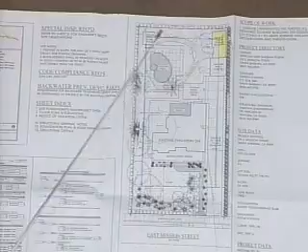The purpose of today's hearing is to discuss the legalization of this as-built storage building. It is located within the required interior setbacks, and this is an E1 zone, so the required setbacks are 10 feet from the interior property lines. The setbacks are shown in blue, and the portion of this structure that is encroaching into the setback is highlighted in yellow. The project also requires a modification to our maximum accessory building size of 500 square feet.

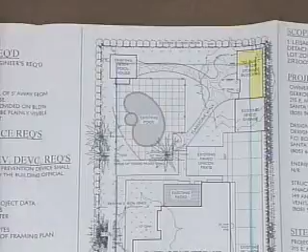Staff does not support this particular modification request, because it is essentially new floor area in the required setback. Staff typically doesn't support new floor area in setback areas when there is a conforming location for a similar type of structure. This is an as-built structure, however staff reviews it as if it were brand new to the site and new square footage. Staff is not opposed to the modification request for the accessory square footage in excess of 500 square feet; however, we believe it should be in a code-conforming location. That concludes my report. Thank you.

Great, thanks. I was wondering, I did have one question related at this point. I went out to the site, and I don't know if you know the answer either, so maybe I'll wait until you do your presentation, because you might. Well, my question relates to, I went out to the site and looked at it, and it is clearly a storage structure, obviously tacked on. My question was whether it could receive a building permit as is.

I've checked with the building department on that, and there are some improvements needed. Cindy Souter, agent for the owners, Jerry and Barbara Rubin, the owners of the property. I did check with the building department, and they are going to need to do some improvements to let it remain, basically installing a firewall on the two property line sides, because it is closer than 3 feet to the property line, and there may need to be some roofing improvements made as well.

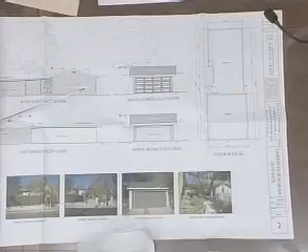Again, my name's Cindy Souter, agent for the owner, Jerry and Barbara Rubin. I brought my own little colored site plan today, too, just to help show the constraints on the property and the existing situation on the property today.

We disagree with staff's recommendation for denial of, or lack of support for, the two setback modifications in this motion for denial.

The property is a potentially historic structure, the Driscoll House. So the house itself and the area around the house is somewhat sensitive and should be preserved as is. This little walkway here is original brick.

And this is a little courtyard. Everything that's green is landscaping, and the lighter green is lawn area. So there's not much lawn, but it's mostly landscaping. This is a little landscaped courtyard area right here, and there's lots of trees, including an oak tree. So this isn't really an appropriate space to put it, plus again you're getting close to the house, which is the resource.

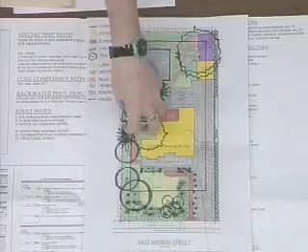The backyard is fairly developed. The pool area obviously needs to have the fence around it, so that's an area that needs to remain as is. This little landscaped area in the back is really the only functional yard area that the property has. There's a little picnic table here, and then some nice native gardens with native plants. So the most logical place for the storage building would be in this rear corner, where it is not impeding the use of the property but also allows the storage to function as a storage unit.

The garage is only 346 square feet, so it's very small for a modern day two-car garage, and two cars barely fit inside of it. So there is a need for storage, as with most garages, you have around the edges to keep things stored. This allows for them to have additional storage.

It is a non-habitable use. It's storage. It's in the setback, so it's not creating a noise-generating activity or anything in the setback. It also provides a view buffer between these two properties. There's an RV parked here that would be visible if the building were not there, and it also provides sound screening from the neighbor next door as well.

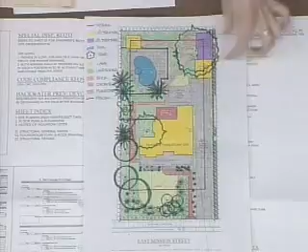We have letters of support from this neighbor, who's obviously the most impacted because they have the most linear square feet of the structure adjacent to their property line, and then from the neighbor over here as well.

And let me check my notes real quick, see if there's anything else I want to add. And the Landmarks Committee did support the location in this far corner because it was away from the resource.

That's the end of my presentation. Okay, great, thanks. I'd like to open the public hearing. Is there anyone here who would like to address the staff hearing officer on 215 East Mission Street? Seeing no one, I did receive one letter from Ms. Paula Westbury expressing concerns regarding the project, and the two letters you referred to were included in my packet. So I'll close the public hearing.

I went out to the site, like I said, and I walked around the site, and generally I agree with staff that the first thing to evaluate when someone's proposing something in the setback is whether there's a conforming location that would work for the project. In your instance, the most logical area would be the one you pointed out, which is the existing usable area besides the pool. In terms of functional use, like eating and that kind of stuff, it's in this area.

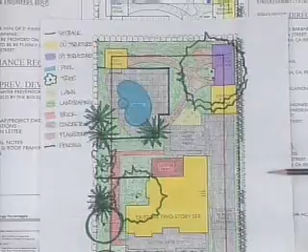What I'm leaning towards is, given the existing development on the site, given the fact that the two oak trees that are there, the location preserves the two oak trees, it's tucked in behind the oak trees. It's a low profile, it's 7 feet tall, which is shorter than the fence height limits, which can be 8 feet in the setback. So the building as it is right now, I believe, can be supportable.

My concern is what kind of changes would be required for building code. Any changes would retain the existing size and shape of the structure. Everything would be done internally. If the roof were to be replaced, it would be replaced like for like with whatever is matching, whatever meets code, but it would match how it is there. Maybe instead of the corrugated roof, it might end up being a flat roof, but the size and shape of the structure would not change as a result of that.

I'm looking for my email from Curtis, I think. It's the one that sent it to me that specified the exact criteria to make it meet the fire code. Which is in here somewhere. Let's see here.

Okay, and then if the roof had to be replaced with some other material but maintain this appearance, would that be an acceptable change? I'm concerned with the height, not the material. In terms of appearance, no issue - it's more the low profile, it's 7 feet. So it's low.

Maybe just add that any modifications could not result in a height taller than 7 feet. Well, in the findings I put it at 7 feet in height, and in the condition I put the roof height changed. I'll put the roof height increased, because if it gets lower that's okay. Right, so just make it clear the concern is having it raised.

Okay, so with the revised findings that it is appropriate, given the reasons I outlined, and with that new condition, I approve your project. My action is appealable to the Planning Commission within 10 calendar days. They also have oversight authority of all my actions. If they felt this warranted additional discussion before them, they could call it up during that same 10-day appeal period, and if that occurs, Allison would contact you. Okay, thank you very much.

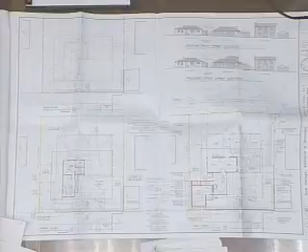I did want to highlight that staff had referred this project to the city's urban historian during the environmental review because the structure is over 50 years of age. The urban historian determined that the proposal did not have an adverse impact on a potential historic resource because they are preserving the front facade of the building, and the new second story is very low profile and not readily visible from a pedestrian on the sidewalk.

You might see it from across the street, but if you were on this side of the street on the sidewalk, you most likely would not read that as a second story. The project as designed is consistent with the Secretary of the Interior's design standards for the treatment of historic properties. The environmental analyst has determined that the project was exempt from further environmental review under the California Environmental Quality Act. The project went to design review at Single Family Design Board on January 28th.

At that time, the board found the requested setback modifications and the second story addition to the legal non-conforming residence were aesthetically appropriate and did not pose any consistency or uniformity issues with the single-family residential design guidelines. At that hearing, there was a little discussion about the existing hedge along the rear property line that is now about 11 feet tall, and staff has suggested that they trim it and maintain it in compliance with the hedge height ordinance, which is 28.87.170.

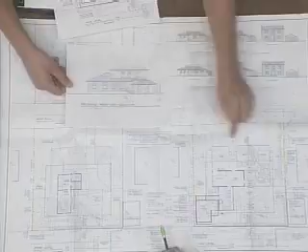The actual dimension, which I have, is 6'5". This front entrance right here at the front door, which is part of the architectural charm, it's 5.5 feet wide, and it creates an alcove, which is kind of like welcome to my house. And I envisioned having a stool here, a bench, a chair. My client works for the Santa Barbara Orchid Estate, so he's always got muddy shoes and all that kind of stuff. So that's kind of what this is, my outdoor mudroom, as well as creating the artistic charm.

Perhaps there's a way of moving a little bit of the garage forward, but I still believe the door is very important, because if there is no door, when we move this flush with what used to be the old sunroom, then every time you park here or you're coming from this direction, you're forced to open the garage door to get into the house. And this door is important—if you narrow this and pinch it down so it's only 3 or 4 feet wide with a 3-foot door, it's basically an alleyway, it doesn't have what I want to call the elbow room.

I always refer to it as a place for a person to stop and pause and wait for a moment, and then enter the room. So I want to have enough room—that's kind of always the way it was designed. The other thing is kind of like in those old black and white movies with Gracie Allen and George Burns, the neighbor always comes by and comes to the back door and they're always talking. So there's that kind of interaction that I kind of see happening here. It's important for me.

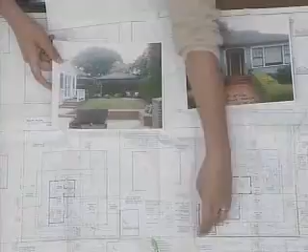The other issue is, as we move the garage forward, we have to realize the impacts happening to this neighbor. This neighbor is used to having this wall here, and we've abandoned this landscaping, and as we slide this forward, it creates a different zone right here, where right now they have these tables and chairs. So if we take this mass and slide it over to give relief to one side, to another neighbor, we're actually impacting what this neighbor is experiencing.

It's important to realize we propose an 8-foot-high fence along this property line. And if our garage, the top of plate is at 7 foot 11 inches, plus the framing above it, the garage isn't much taller than the fence we're proposing. So by moving it over 3 or 4 more feet, we're not benefiting one neighbor at the expense of another's use of their yard. We have to weigh it back and forth.

My strongest point is the creature comforts, the romantic aspect of using this house, as well as trying to create the artistic charm. So that's kind of where I've been coming from.

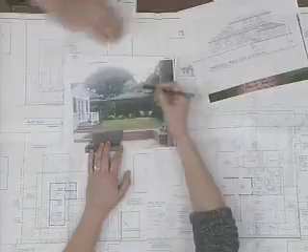You're filling in this area already. So how is moving it up impacting the neighbor here? It's opening up this back area. We're filling this up, but we're filling that area up 12, 15 feet beyond. When we slide this wall over, this wall is right at the property line, or a foot from it.

Yes, so we're taking this element and sliding it over. We will have to trim some of this hedge, and that's just what it is. And this little fence they have here, which is on the property line, will get altered.

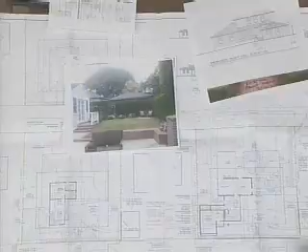It's like 1 foot 8 inches now, and we're moving it to 3 feet. The reason for 3 feet is the building code rule: if you're less than 3 feet, you have to have a firewall measured from both sides of the framing, not just the inside of the framing.

Okay, and this dimension here, I have it at 6.5 feet, and at the front door it's 5.5 feet. So there's room to move it another 1.5 feet, but not much more than that, because then this becomes just a windowless little alcove - it gets boring and cold. I always envision a little potted plant or a bench to enliven that entry.

Okay, great, thank you.

Is there anybody here who would like to address the staff hearing officer on this, on 32 East Islay Street? No?

I'd like to note I did receive a letter from Ms. Paula Westbury on this project, also expressing concerns regarding the project. So I'll close the public hearing.

I also want to note that at the Single Family Design Board level, two neighbors submitted letters. One was Greg Morell - is that right, Phil Morell? Phil Morell, I think I'm combining the two names. Phil Morell and Mike DeLuca.

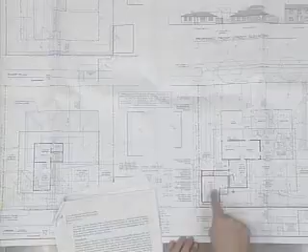Like I said, I went out to the site, visited it and walked around. I believe the modification request to allow the reconstructed garage to remain within the east setback, as well as the extension to meet code requirements, is an appropriate improvement on the lot. My main concern, as I pointed to in my questions, is this rear proposed setback, given that it appears there is room to move the building up.

And you're saying you'd be willing to move it up a couple feet? A foot to a foot and a half. I wouldn't want to make it less than 5.5 feet, which is what they currently have here. If you went to the front door and stood there, you'd realize this is tight, and so I stood there thinking I'm going to make it a little bit bigger. So I would not like to make it less than 5.5 feet wide. Right now I'm at 6.5 feet, so it'd be moving the garage forward an additional foot.

And as the property owner, you'd be agreeable to that? You're on the spot. Well, in order to get this thing through, probably. But with the fence and the height of the roof and the way the balcony is, I keep losing more and more space.

Okay, well, I don't feel I could support it as is. So I could just deny it and it could be appealed to Planning Commission, or I could approve it with the additional foot and a half encroachment.

And then you can discuss going with a foot, and discuss it and decide if that's livable, and you still have the option for appeal. It'll be 5.5 feet, which will be livable. It'll be the same as this area.

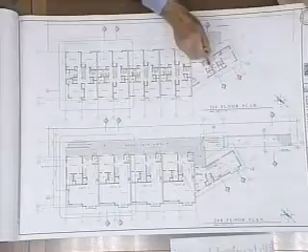The last time it was reviewed by this board, was it 4 units? Yes, 6 actually. 6 and 2. Before it was 8 and 1.

So this is a roof plan. It's a flat roof plan, a membrane. That gives some idea how it drains.

And large floor plans showing the paving on the first floor, and some pots that we're going to talk about in a few minutes - very, very large planters. The other element on the first floor is the ADA unit and the townhouse above.

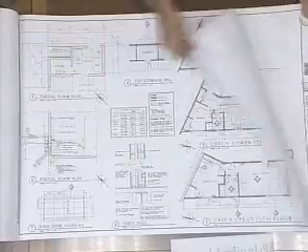This is the paver I'm trying to use on the second floor. It seems like we can afford that, it's not that large an area.

This is how it has changed. As I mentioned, I did change a few things. This is at 1/8 inch scale. The next page shows the main portion at 1/4 inch.

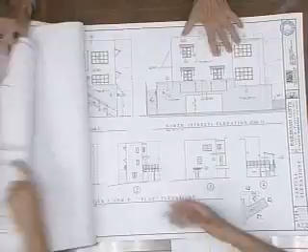Can we actually look at this just briefly? Yeah. So this versus that. I just was, yeah, here. You're gonna see much later on, you'll see the... yeah, you're faster, somewhere in here we go. Yeah, basically here. Okay.

This basically was a personal reaction, a way to tie the building together with metal awnings on both sides, where needed, in order to create shadows, and it goes from here to there. These awnings are carried around on the other side.

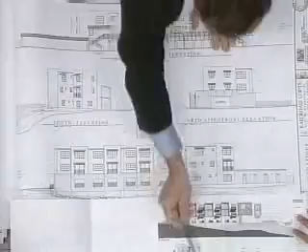And trellises. Another change is the substitution of glass canopies, which were used on the entrance - these are glass canopies, yes, one in the front, including the one in the front for a trellis. It's part of the strategy to green up the building.

Is this a metal trellis or wooden? No, it's steel. There's no wood in this project. The idea is to have different levels, especially coming here from the more visible side. So we have trellises on the fence, vines on the fence, vines on the railings, and finally vines on these elements right here.

And this building material, was it different than this one, or are these the same materials? It's all plaster that indicates a darker color. Oh, so there are lines here? No, I'm sorry, it's just a way to indicate the different colors.

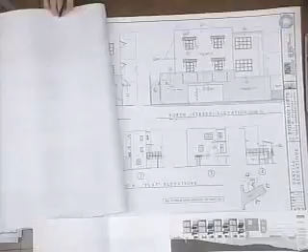This light is not very good - it could look like white when the sun is out. It's called mushroom basket, it has basically the color of a mushroom. This is a color for this portion of the building, a color for the doors, the windows, the galvanized, and the roof membrane, which is a white roof.

That's as close as it gets sometimes. I mean, this is a white membrane. That also is a cool roof.

Let me go through it, and then we'll go back to elevations. I'm sure you have interest in commenting on that. These are the main elements.

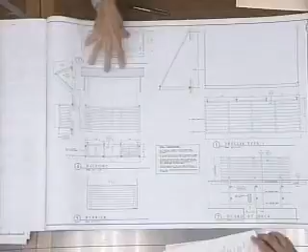Usually they go like this: they have the awning, the balcony, and the car barrier below, the steel trellis and the railing.

This is the other one - the one in the front is a little bit different, the front staircase.

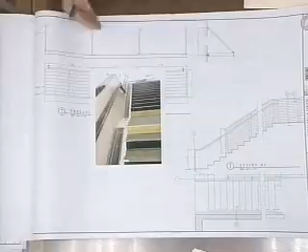I have a detail here that relates a bit to what we do - this is kind of interesting, perhaps you can take a look. This is a retrofit in a London subway. The purpose of these things, which I have another detail of, is to basically bring bicycles up - probably everybody's experienced going up a staircase with a bicycle. In Europe they do it like this. I've modified this sheet to add this detail, paying attention to it. It's just a little detail, but it would be a nice thing to popularize - you bring this little 4-inch curve for people to wheel their bicycles. Just a little detail.

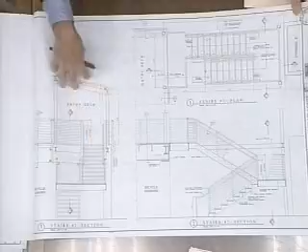This is the rear staircase, which is really very different from the one approved previously. I carry the same roof. The other one had some kind of covering, maybe concrete or plaster. I thought it would be easier to just blend it with the rest of the galvanized awnings. It's an open staircase. This is the section through this.

The structure has changed completely. It used to be concrete T's spanning the whole building. We want to use steel to make it lighter, to have fewer piers. The soil is very loose, I think it was a site with some kind of uncompacted soil, so we're relying on that.

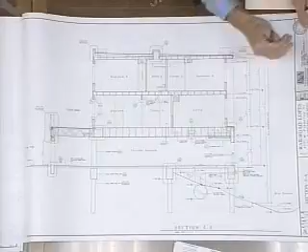This little thing is a requirement of flood control, not to occupy the space. If we close the building here, we eliminate an area where water is stored. This is on the west side, and the pipe that connects under the freeway is undersized. The water backflows in a 100-year storm and floods this area, so we're not supposed to minimize this floodway area.

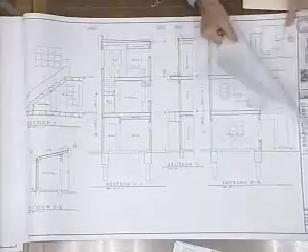Same. This is the section through the small wing. This is an interior elevation, which you don't care about. The basic steel details, the awnings, the attachments, the railing.

The recessed windows—I wanted to at least recess these windows a little bit. Those are standard windows, yeah. All the windows are recessed like that? Yeah, except I couldn't really work on the doors, but there aren't that many of those. So this is the majority, they go like this. And a little bit more.

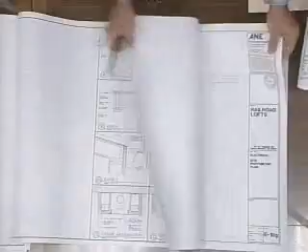It's just basically wall details. Light fixtures, I think you probably would be interested. Exterior light fixtures and site lighting. Yeah, there you go, here we go. This is the light level.

So these are the light fixtures, which I reproduced here. It's just this picture right here. It's flush mounted on the ceiling. So at the exterior doors for each of the units? This one, which we'll paint a different bronze color as well.

It's shown in the elevations. And they'll be bronze in color? Yeah, yeah. Well, excuse me, these ones over here are going to have a ceiling mounted fixture. It's going to be this one. I mean, recessed. But there are some other ones. This one appears a lot, we have like 16 of them.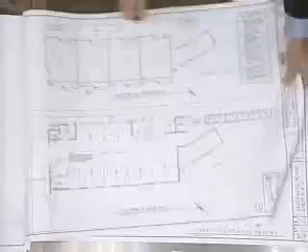The second floor, maybe? Yeah, a little bit higher on this walkway. Okay, and the staircase as well, that appears a lot. I was curious about the light level, and it's pretty much not very bright. You can see how the spill is at 0.01 over here. That is pretty good.

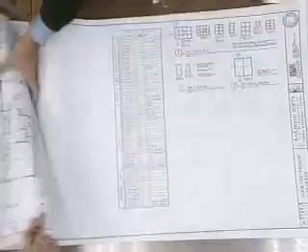Well, we have landscaping—just let Charles talk about this. What I want to mention is that we thought a lot about landscaping on this side, and that's why the concept was to really screen it from this side with the different elements, including the second floor pots, one on one side. Yes.

Alex, can you point out where on the elevation that exposed underneath area occurs where the drainage is? Can you just show how that's represented on the elevation, the 1/8-inch elevations? Where the water goes under the building where the concrete slab is? Sheet 18—oh yeah, it's more under the section.

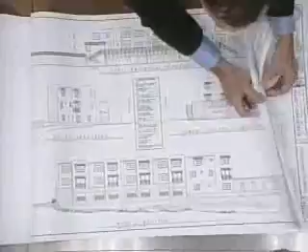Do you see it on the elevation? Yeah, they go right there. Oh okay, it drains to this side, and it goes to the concrete beam from there. I think one of these shows it here like that. Yeah, the water goes to this side, and it goes right there. Okay, and this is for storage and percolation.

I'll just go back to this sheet. Yes, please.

Yeah, so here we've got the landscape plan. Everything on the west side—Alex is calling it the west, I was referring to it as the south side—this is all a bioswale area. You can see that the water comes from the street and from the building roof, and it gets directed into a series of little check dams. We're all riparian and natively planted out there.

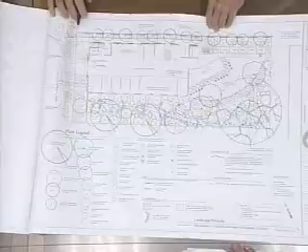Then at the front, there's a street tree, Pyrus kawakamii. We talked to Tim Downey about that. So we've got the street trees, and then a really tough and long-lived landscape, just nice, tough, and strong. We've got some vines coming up on the overhead structure above the driveway, and along the 101 and railroad side we've got screen trees of two different types. And if you'll see, we've got ficus repens pretty regularly on the inside.

If we go over and look at some details on the L2 sheet, here's a section through that—we're giving them a little opening so the ficus can get outside the fence, because the property line's right here. We're thinking this would be ripe territory for graffiti, so that's a custom detail to try and combat that.

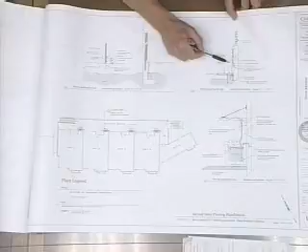And then on the second floor, we have 42-inch heavy pots or urns, and this detail shows how we're going to take a stainless cable up to get them to climb up on these overheads that are dashed. And similarly against the building. Then we go on to some of the stuff the Creeks people are interested in these days, and we're just showing that we're all automatically irrigated.

What's this material going to be for the common area? Well, this is just a 3/8-inch angular gravel court. We talked about different things and concluded on just a gravel court with kind of a rubble or stone retaining wall, about seat wall height. That's our proposal for the open area, a gravel court.

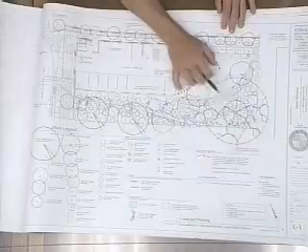And if you go back, you can see how the planting works with that. What was there previously, or was there never any? It's always been gravel in all three of the iterations. So some of the plantings kind of come up out of the gravel, but we propose to float the whole thing in just gravel and let the tenants arrange some furniture or do as they will out there.

Okay, great. Anything else for your presentation? No, that's it. Okay, I will open up public comment.

Anyone from the public wishing to speak on this project? Having no pink slips and no one coming forward, I will close public comment and bring it back to the board for questions of the applicant.

Excuse me, Mr. Chair—we should acknowledge a letter we received from Paula Westbury with concerns about the project. Okay, and a couple of staff comments. Yes, there's some question whether the landscape plan meets the water compliance regulations. So if you approve it, could you make it a condition that we correct that if needed? There are some outstanding issues that haven't been resolved about whether anything needs to be changed.

And the Planning Commission resolution just asks that the ABR review and approve. Let's see—it says prior to building permit issuance, the proposed project grading, landform alterations, structural design, landscaping, and lighting are subject to approval by ABR. All right, thank you.

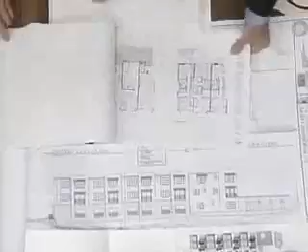Let me go back to this elevation. So it just seemed really trite and silly—I think the comments were that the board wanted more relief, more shadows, more expression of the architecture. Rather than trying to mess with that design, which I thought wasn't going in the right direction, all that design was some kind of celebration of a little window in the bathroom with an indent that didn't quite relate to the vernacular of the West Side. So I decided to simplify that instead, put in awnings, and bring the theme—emphasizing the difference in plane and breaking up the elevation—the same way on the front and on the west side. That's how I addressed that.

I know it's not specifically the same direction, I just thought it was more appropriate. There was a comment about what's happening site plan wise versus there was a themed wall that was going to be trying to come across here. How did that change?

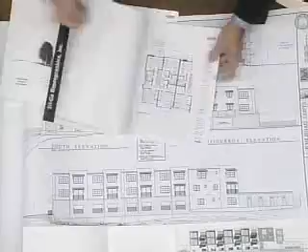Similar idea. That wall was just basically a continuation of this wall with a little arch that really led nowhere. It was a way to come in and check on the meter, on the electric meter on this side. So where are the gas meters and electric meters? Yeah, they're in the front. The electric meters are inside now.

It just seemed too trite. I'd rather have a fence and landscaping. We're going to put vines on this. But wasn't that always a retaining wall? From this, the retaining wall. It is still there, on that side. It's still there, it's a retaining wall with a fence. So now this is just a normal 4-foot fence. Yeah.

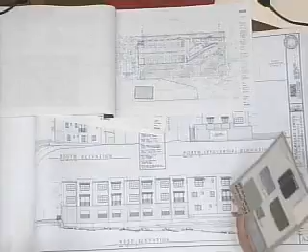If you don't mind, I have one last question, then I'll kick it to the board. This is for staff, was there a previous color board? I was just looking, I don't see a color. We have colored drawings, but no color board. I don't remember these colors from previous applications. But okay, there's interest in a dark color.

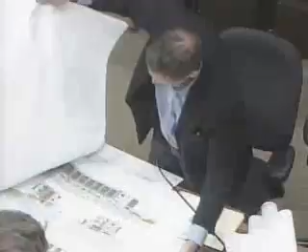This is one redesign. This is the other. These are the way it has evolved. Okay, 2011. 2011, the other one 2008. And the '12, I don't have it in color, but I can see the idea of the darker bottom floor and light on top.

Sure, go on to Kirk. Alex, on the previous proposal, I'm not seeing it noted here, but it looks like there was a different material, at least a couple of different materials, not just changing in color. Hardie board siding, maybe this is what that is. I think it was board form concrete. Okay, that's right. And then there's also looks like there's horizontal siding up here, but that's been eliminated.

We could bring it back, that kind of siding that would be easy, if you feel strongly that that's something. Okay, well I'm just trying to clarify, it wasn't clear if it was blocked or it was covered or exposed.

And then also on the west elevation, it looked like there was an eave that was also being carried down, providing a break between levels. Is that, and that's been completely eliminated too? Well, the eave is there. So okay, a couple of feet bringing it down to the ground. Yeah, I think he had some, he was bringing it. Yeah, if you look at the plan, there was a way to do that.

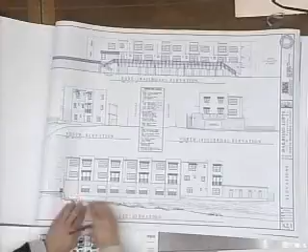Alex, is it a necessity that all of these have to be open? For example, could this end one be closed, or do they all have to be that way? Just wondering if there's a way to bring the building down more to the ground instead of just all stilts. Yeah, it seems like you could grade underneath so the water would still flow around. This is what we really need to do - push it. Yeah, we need to bring this in there.

What is that - some sort of drainage mechanism? Yeah, this is the storage. This is to retain - it's not really flooding, it backflows when it floods. It is to retain the water. There are two things, and this big pipe is a controlled release, retaining controlled release. Is that the idea? Well, all the roof and hardscape water ends up in this chamber - that's the second thing.

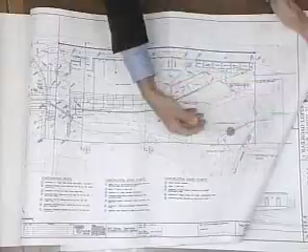There are two things - one is this typical swale, tier 3 kind of thing, but the excavation around is to retain on site. When this floods, the water comes this way. There's a culvert here which is undersized, and the water starts flowing back and takes time to settle. That's a requirement, not to alter the original geography of the place. But to answer your question, perhaps it could be massaged a little bit, not too much. I would rather try to hide it with landscape - that would be my first preference.

Questions from other board members, and if not, we can move on to comments. One other quick question - are these a different color plaster, the recesses? No, at least not at this point, no.

What is the color of the roof? You mentioned membrane - it was a cream color. It's just a membrane. So it's a reflective roof - a cool roof. Yes, a cool roof. Not the coolest, but this qualifies as well.

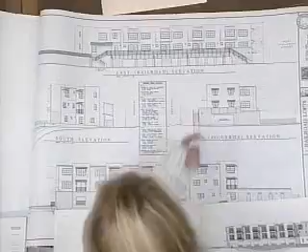There's a landscape architect question for you. In between here, there's lots of planting. Yeah, exactly, can I draw on this, there's screen trees that are up to scale, and then there's vines that do this, and vines that grow on the building on this portion, and also a big pot here that gets up on this guy.

Okay, let's go into comments. The applicant is looking for final approval, and if we think it's there, we say yes. We can make comments and take it to consent, or we can make comments and bring it back to full board.

Mr. Chair, one more thing needs to be addressed, and that's the stormwater management program. Alex, did you bring any further documentation showing that requirement's been met? No. I followed up with the civil engineer, Dale Weber, and he claims to be in touch with Autumn Malacca, and we've been going back and forth, but I really don't have anything to show. Okay, so that would have to be demonstrated prior to final approval, but we can follow up at consent. What I heard from the civil engineer is whatever happens, it will not alter the landscape plan, it will be underground. If it alters the landscape, of course we'll have to do something. We'll come back to it.

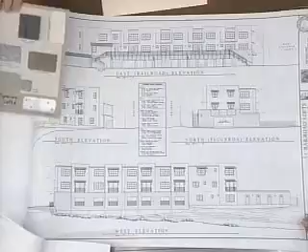One last quick question, can you reiterate where the colors are going? Which plaster color direction? This is the main plaster color, this one right here, which looks kind of sick under this light, but it's not, it's a happy color, it looks pretty white outside. And then the base, this color is the base color. Yeah, and this one would be for the doors.

Also changed this window right here, shown in the corner window. Yes, just the full corner window right there. I can put it back if you guys want. I just felt it wasn't appropriate, it was the only one in the project like that.

Mr. Chair, I think I'm ready to make some comments. Okay, move on to that, go for it, we're ready for comments.

I appreciate the additional effort put into the design, simplification, and trying to meld it more with the West Side vernacular. But I also remember very clearly this was one of the first projects that came before the board when I first joined, and that's why I abstained. It was the first month, and I didn't have a chance to pre-review the tapes at that time, but I remember very clearly reviewing this, and the comments that were made about the north elevation in conjunction with the west.

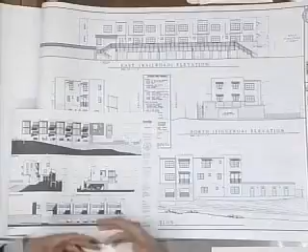And more importantly, that this kind of asymmetric playfulness going on the north elevation be carried around that corner, because once you turn that corner, you get this very repetitive stacking of units along the side, which differs strongly from the north elevation. So we wanted more of that playfulness of massing and detailing to continue to some extent on this side.

So now I feel like that asymmetric playfulness that's here has been eliminated, and I'm not sure to the benefit of the project.

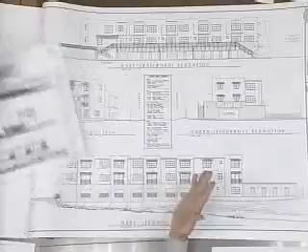The other thing I mentioned is I'm focusing on the north and the west because I feel like those are the two most public parts of the project. The east elevation facing the railroad, with the bike lane and handicap access, is more or less a dead zone. It's not as visible to the neighboring residences and the public as the north and the west, so we focused on those two particularly.

My comments would be to try and reintroduce to that north elevation some more of that playfulness that was in the original proposal, and likewise carry that around, at least to some extent, on this more public portion of the west elevation. As the project recedes and these areas become less visible, repetition is more acceptable, but at least for the front portions try to bring some of that back.

I also really enjoyed the changes in material that were originally proposed, helping to break up what is otherwise a rather uniform massing arrangement. Now we've lost that as well, and all we have is a change in color plaster. Again, that relief from the mere repetition of surface and massing has been lost, and I'd like to see some more of that come back.

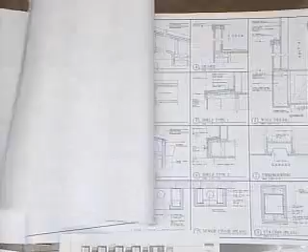Okay, can you be more specific about what you meant by that? It was just too much of a ledge, like a pitch and stoop. Yeah, sorry, yeah. We'll go on.

Okay, anything else? Move to Scott. Yeah, that's it. I heard Kirk's comments, and I think I agreed with most of them. I think the front elevation on Figueroa lost something with the asymmetry. There was a charm to the asymmetry. I think this works, but my preference would be the more asymmetrical facade.

Yeah, I was sad to see the board form concrete go, but I completely understand that - it's a very expensive material. I think a change of color there is important. I think you've done the right thing there, and the detail you have now, for me, it works. There's enough change in plane at the top of the formerly board form concrete that I think that's a nice detail. It's a good solution to the project. Overall, I think it's very well detailed.

I like the canopies, and the railings seem very well detailed. I am missing the kind of change in material here. I think that could be where you formerly had it look like horizontal siding of some sort. I think that could even be done with a change of color. I think it would add a little more life to the elevations.

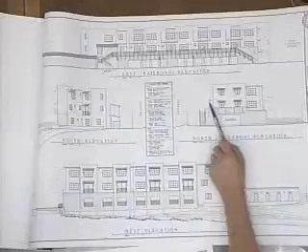Compared to the way it was, really for you, how it is now and how it's going to get built - I have to agree, it was a little more unified previously. Okay, and what about this gable and this look? Even though this is a carryover of the previous design, the awning thing has gotten wider, so now it's required to... I like the new design.

All right, Stephanie, your comments on this, because you didn't comment anything, I don't believe, on the canopy on the front of this one up here? Correct. They don't bother me. I mean, extending them out a little farther so there's more of an overhang - equal, the same, just a little more extension would help it. I think it terminates a little too short.

That would help. And also, a comment about the vinyl windows - we typically recommend metal or aluminum clad windows, and I appreciate the color that you've selected, and I think it's going to punctuate those openings well. But I would like to see it in a metal clad instead of fiberglass or whatever, vinyl.

I missed that about the windows - I thought it looked like aluminum clad. That's what I thought. Well, he was very coy in how he worded it, but I did see the word Milgard vinyl on your window schedule. I allowed you to speak.

I have a question for the board in general - is there a precedent that we've set that we're not allowing vinyl windows in the City of Santa Barbara? I mean, this is not a white vinyl, obviously, it's an upgrade, it's a darker color. It's just been an established precedent that the white vinyl windows we've seen, because of the width of the sash that goes around it and the amount of glass you actually get, has been a deterrent. He has detailed it well, I will say, and the way of wrapping them and recessing them to the interior face of the wall is good - it's a nice detail.

Question for the board: did we reach a consensus on whether this window is acceptable? We didn't, we avoided it. It's a non-retrofit colored vinyl window. It's an important point, so let's add it to the motion that the board is finding the vinyl windows acceptable because of the quality of the detailing, the recess provided at the windows, and the color of the windows.

Okay, so with that, I'll call for a vote if there's no other discussion. All in favor of the motion? Aye. Opposed? No. Abstentions? Two. And then the next time it comes back, you two can jump in.

Just let me ask you a question. Especially, I think Howard brings a very good point, and that's what I try to do. Do you think I did not move that in the direction of Santa Barbara? I'm just asking the question. Sorry, so you said why? I think the whole purpose of this. Yeah.

Your question is moving it in the direction of Santa Barbara. I thought I had done that, and I just want us to communicate. I found a project that I thought had some elements—especially this staircase, the corner window, and elements of the front elevation—that were really in context for the west side. I tried to bring that in. If I'm wrong, tell me, because I understand. My point was actually very simple.

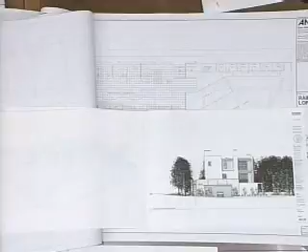Okay, keep talking. No wood, no stone, stucco, nice colors playing off of each other. No, it's very hard—it's a very hard building, with hard, sharp lines and so forth.

And sometimes, maybe instead of a sharp line up there, if you just had a little trim—not an ogee, just a little detail—something that catches the eye as opposed to just seeing the edge of something. You do have the playing of the forms. There's a little bit of...

She'll tell you what's up. But there is very little relief from the three stories. From the ground up to the top, it's a mass, and you're just playing with ins and outs and ups and downs with mass.

I suppose that would mean I'd be more in favor of the asymmetrical approach. I'm saying I started with an approved preliminary, so that's to answer your question. I would say you were successful. You opened up a can of worms, and now everyone can give their comments. Tip, then Kirk or Scott, and then I want to jump in.

In my opinion—and I'm new on the board—I feel we should stop design by committee, because we should give the architect certain freedom and liberty. I think we should let the architect do what he feels appropriate for the building, instead of commenting on the distance of the support for the awning or the ogee molding. That's really dangerous, because we all have different opinions on how to do things. If we focus on the big picture, I think it would help. I don't think we should personally try to design the building for the architect. I say that because both of us have been on both sides of the fence, and there's nothing worse than having a vision for something and having the board tell you to do something else. That's just my opinion.

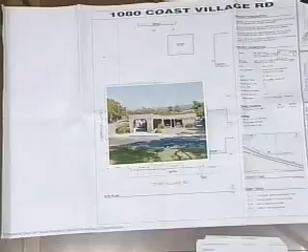The architecture that exists on it right now is reminiscent of the pool supply store—the shape of those windows and those curved round openings. Below that is some residual gas station structure, so what we're trying to do is really just give the project a facelift.

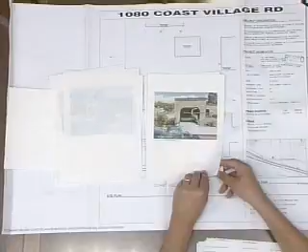The project description is to retain the commercial, retail use of the building, and not only give it a facelift but also make it more attractive and fitting to Coast Village Road—to organize the pedestrian and vehicular circulation and define some parking spaces. The use of the building will be retail.

Currently there's a wall here which would be coming down, so the perceived length of the building will be shortened. It's still a little unclear what the required parking will be, and I suspect we'll come back with maybe a slightly different site arrangement for the sidewalks and parking, as planning has yet to determine the number of spaces, and transportation will help determine the configuration.

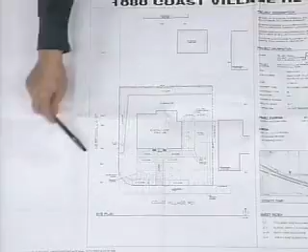Currently the site flows with vehicular access off Hermosillo on the corner and off Coast Village Road. To some degree, the circulation around the building may help with whatever the parking requirement ends up being.

Specifically, the scope of work is to take off the canopy that projects out to the right-of-way, and then to work within the existing envelope to create a facade that looks more retail and more attuned to the street.

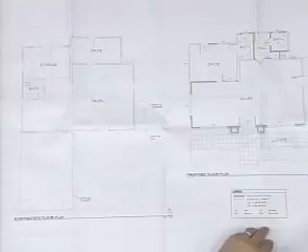In terms of the plan, a lot of the existing framed wall is wood framed with some stucco. There's been some exploratory work going on, and the idea is again to stay within the perimeter and to organize the entry with some symmetry.

The goal is to create something that looks pedestrian friendly from Coast Village Road. The early sketches go with a Mediterranean feel, not introducing a Spanish roof but keeping it with parapets, drawing a lot of attention to the entry, and providing a lot of windows for the retail nature of the building, with awnings to accent it, basically at the same height.

But in concept, this is kind of where we're going with it.

Do you have a landscape plan at all, or any ideas for landscaping? We don't, until we really get our parking sorted out. I think the closest thing we've got is what you can see on the site plan—there are some opportunities to landscape areas that aren't currently landscaped.

I think that was a great presentation. I will open up public comment. Is there anyone from the public wishing to speak on this project? Seeing no one, staff has no letters either. Move it back to the board for questions of the applicant.

Excuse me, Mr. Chair—we did get a public comment letter expressing concerns from Paula Westbury. Okay, and just a couple of staff comments: there's a 10-foot front setback, so those two proposed parking spaces closest to Coast Village Road wouldn't be allowed.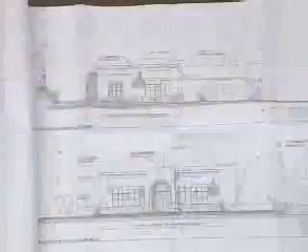Tip: Matter of fact, yes, I definitely think this is much improved from what's there now. I just have one comment to the applicant — I feel that maybe the front could be just a little bit taller. It might help, because the difference between the front end and the side is too close apart to really set a statement. It's already a statement, but I feel that maybe just a little more might help. Might want to consider that — it's up to the applicant. Okay, that's just a comment.

All right, I have a couple comments. So the site planning, I realize there's lots of unanswered questions, and I wish some of those had been addressed before it was reviewed by the board, because this access is not going to be here, and that means that both of these, probably neither of these parking spaces will be here. And you've designed the building based on this walkway that comes in between the parking, so that's all going to change. I mean, this all could change.

I would like to see that change, because what detracts from this building for me is the fact that you're going to put the cars right in front of the building. If there was a way to have parking occur back here, and since this exit has to be moved, perhaps something like that. I don't know, but if there is a way to not have the parking directly in front of the building, I would be in favor of that.

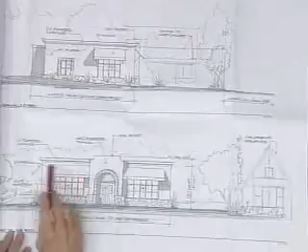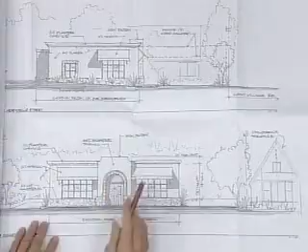The other comment is that it's obviously going in the right direction, but the detailing will be really critical since it's such a simple building with this very obvious symmetry. The cornice detail, how the flat roof transitions to the parapet, how it's all detailed, the way the stone is detailed, that it's real stone and not imitation, and the thickness of the arch and all the pieces - that's all going to be really important to study carefully.

Thank you. So if there's nothing else, Gary, I'd like to appoint you to make a motion. I move for an indefinite continuance back to full board once the site and parking has been worked out with transportation. All right, so we have indefinite continuance, full board.

We'd like to have this see it back here at the board. The project is headed in the right direction. And we would like to see the trash enclosure placed someplace on the site. And we look forward to further details of the front architecture, including the stonework and the archway.

Some board members would like to see perhaps the entryway increased in height or have some more variation between the existing parapet and the new entry facade. And we look forward to seeing the changes about the parking to see how that affects the landscaping and the circulation. Beautiful.

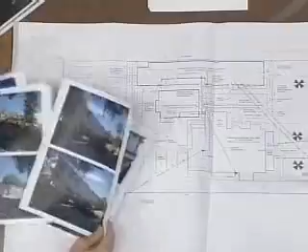The annex buildings burned. Fortunately nobody was killed, and I don't even think anybody was injured seriously. I believe there might have been a cat, however, that sadly perished. But they had functioning smoke detectors, so everybody got out, I think. So the insides were burned? Or the whole building is dead? Both these buildings are gone. They're no longer there.

So Mr. Garrity contacted me, since I had done the original field measurements of the boarding house itself, to document what had been lost for insurance purposes. He gave me drawings that the insurance people had of the buildings they based their insurance on, and I took those in conjunction with some pictures still available on Google.

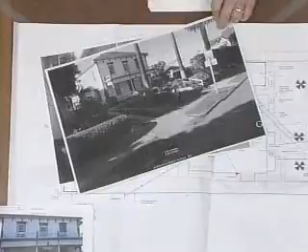The pictures showed a little bit of the houses that burned, showed some of the detail—you can get the window detailing, the board and batten, and so on. You can get the roof lines and pretty much extrapolate what was there.

What buildings are we looking at in this aerial? This is the Flying A boarding house itself. This is the long building, units B through F, and this is unit A—those are the two buildings that were lost. They're one-story elements. There's the same long units B through F and unit A, so I can pretty clearly identify the roof patterns and roof plans from those.

Pass them to the other side of the table when you're done. These are great pictures—thanks to the magic of Google, they hadn't been updated since the building burned, so I could just grab these pictures right off of Google.

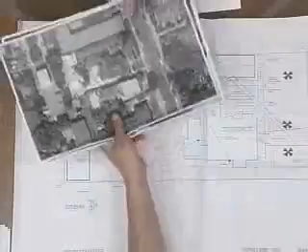You've probably seen pictures of the surrounding neighborhood, but briefly: starting from the corner of De la Vina and Micheltorena, this is the long apartment building right next door to the project. That's the Flying A boarding house itself. That's the site of the former units B through F, which parallel this apartment building along the west property line. That hedge is right here—there's a large hedge right along here. That's a pretty good shot.

I don't know if you need these other pictures, they're just kind of historical—neighborhood context.

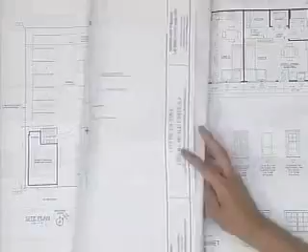Can I ask staff a question before you continue? It said it was a like-for-like rebuilding. So when it means like-for-like, can you change the exterior building materials, locations of windows, roof pitches? How much can we tug and pull the architecture, and how much should we let staff make sure that it's like-for-like?

Well, if the existing property was non-conforming to the ordinance in a few respects—I know one was the setback along the long side of that building, which is very close to the property line. One consideration with that side of the building too is that the applicant's proposing to remove the windows, I think.

I've been informed by the planning department when I initially approached this project that yes, it has to be replaced like for like, and he's entitled to build the same square footage, same number of bedrooms, same footprint in the same location. But he still needs to meet current building code requirements, which has to do with protection of this wall that's one foot from the property line—we're not going to be allowed any windows on that wall. So that's just a reality we have to deal with.

For information, here is the set I produced for the insurance company. This showed the windows in the back that you now have to deal with. In that process, if you compare this floor plan to the one that's there, you can see how I tried to maximize the exposure of the public, group spaces, and living spaces to where light was easily available.

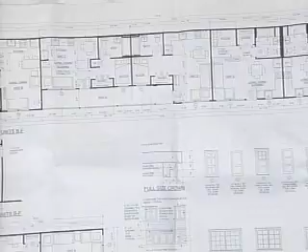Now, it doesn't show on this floor plan. The other consideration is these windows here, especially these windows. The other building, the Flying A boarding house, building A, comes very close, within 4 feet of this building, so this becomes essentially a light well or a court. I did do an area check, and I believe I'll be able to count all the buildings on the property as one building for separation purposes. So I just have to make sure I picked one wall or the other to protect, and the other to have the openings.

Now, obviously I've got these—this is their only chance for openings, so this is the wall that gets the openings. Building A, which is a few pages back, has a wall facing here which does not have any windows. For that reason, it'll have to be fire-rated, in order to give the windows to these units along there. Okay, let's look at the elevations.

This is the non-fire-rated elevation. That's the non-fire-rated, yeah. And if you'd like, you can see the historic elevations as close as you could. So you can see I didn't change any of the roof pitches or roof lines or the appearance of the finished materials or whatnot, all of that.

All I did was drag the windows around. And since I did it in Vectorworks, the windows are on a layer above, so literally I didn't change any of the backgrounds. It's just a matter of dragging the windows around where they needed to be.

So, Mr. Chair, getting back to the non-conforming issues: it's non-conforming to setbacks. Also, separation between buildings is non-conforming. The residential density, the number of units, is non-conforming—that's why they can't add any square footage. And the number of parking spaces is non-conforming.

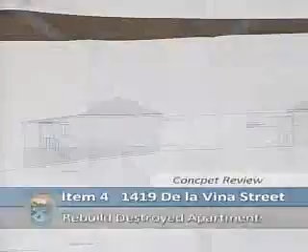Okay, I think I want to go to the site plan and have you show us the stairways and the property line between that. And I think that takes care of your presentation.

There is one little change we think we want to make in terms of the site plan. If you were to look at the original buildings, this building A originally had a little porch that welded onto that corner of the Flying A boarding house, and that just seemed totally awkward, so we wanted to remove that. That's one minor change—I think it really helps both projects. It was really an ugly transition, difficult to flash, and inviting waterproofing problems and so on.

This is the exterior exit stairway here—that's the problem. This is the wall that has no windows. That's the wall that has... well, I think it has some windows here. Okay, take that back. And this is a wall that has no windows here because of these windows facing here. And then this wall, obviously, here has no windows.

Great. Anything else you want to add? I think that's it. It's a pretty straightforward project from my point of view.

Alrighty. I will open up public comment. Is there anyone from the public wishing to speak on this project? Seeing none, I'll close public comment and go to the staff.

Staff has a couple of questions and comments for us pertaining to this project. We did have a public comment letter from Paula Westbury. We were just going to investigate with building and safety if there was anything that could allow some windows on that side, if possible, possibly a land use covenant or something that there would be some building separation to the buildings on the adjacent property.

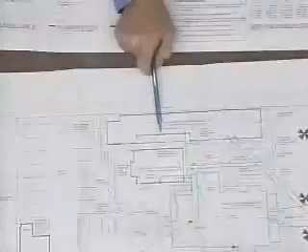Okay, yes, I have a question for the applicant. Go for it. Gordon, can you tell us why you are removing the windows on Building A? I see that there's some existing windows on the original drawings on these windows along this wall here. Right, that's to give protection to these windows, to allow these windows to be in this wall over here. In other words, there's not enough distance—there's just about 10 feet, if you will, in here. So one of these walls needs to be protected.

Really? Yeah, one had to be protected. I thought, when you have the courtyard, as long as within 10 feet you can have openings, because you mentioned they are like one building. Could you add these two square footages into one structure? Yeah, I actually added all of them. So then there is no assumed property line between them. Well, there's a court—it's a court, and then you've got to... If we can get windows in here, I'll put windows in here. Believe me, I'd like to have some windows in this wall here.

At least my first reading of the code - and it's changed a little bit - this is construed as a court, and the regulations apply to the protection of windows within the court. When I read it, I had to really pick one wall or the other to be able to have the windows in. When there are more than one building on a property and they're close together, you can put a property line between them, and you can move it anywhere you want for your advantage. I think the code says protected openings less than 5 feet, no openings less than 3 feet.

So if your property line is like 4, 11, or 5 feet, you might be able to get windows on both sides of that. The problem is the other building on the property line - that's the problem. This was the building that needed these spaces, you can see in here. They have no other place to get any light, so it chose to put the assumed property line right basically along that building there. But you could put it in the middle between the two, split the courtyard, and get windows in both buildings with protected openings. Let's move on to the architecture, but if that's a concern, we can ask him to further investigate the possibility of adding windows.

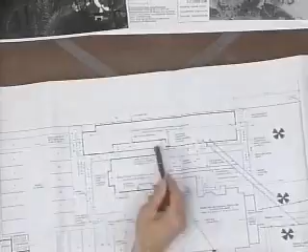The ramp in between the buildings - is that needed to get handicap access up to this point? We're still fine-tuning the topo here, so we can get the path of travel completely figured out. If it's possible to go this way, we might, but I don't think there's enough room in here to do that - that is the intent of that, to provide access. So that entire ramp is needed just to get up to that point? Yes, it is. And is that where the original entrance was? Yes, that's where the original entrance was, right along that stairway, or that balcony, excuse me.

One more question for the applicant - go for it, Tim. Can you add more windows to the east side of Building A? Sure - oh, that's the east? East side is this one. No, this side - that's east, right? Right, this side. Let's see how many we have there now. South - oh, I'm sorry, the south side. Let's see what the floor plan is there. Is that this one? That's the east. South - no, that's not the... well, let's take a look at the floor plan again.

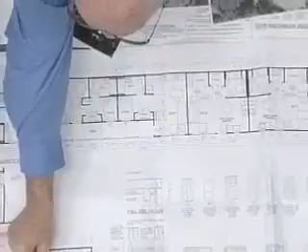Maybe you're calling this east on your elevations. Yeah, that's what it looks like. Okay, well right now we have one - if we can get a window in that bathroom, we'd be happy to do that - study area, maybe. And this may be facing that stairwell, so that may be in trouble.

He's got an adjacency issue with the stairway down here - an exterior exit stairwell. It needs a protected wall within, I think, 10 feet or so. But I'll look at that carefully, and if we can add windows there, I definitely will.

Well, we're not going to challenge your code research, but we'll question it. Yeah.

So let's move on to some comments and then wrap this up as a motion. And then we can decide if it's going to be returned back to full board or returned to consent.

Mr. Chair, your comment. I think it's fine as proposed, and I appreciate the meticulous effort to reproduce what was there before, to the extent of even the siding matching the different stages of building that were done. In some ways, you could say it's returning the property to its original historical content.

And I think if Gordon can find some ways to add more windows, I'm sure both the owner and the architect would be interested in adding additional ones wherever they could. But I don't see any point in trying to force high-cost windows along a side where we've got property line issues or adjacency to other buildings. So I think it's a good proposal, and I appreciate that effort.